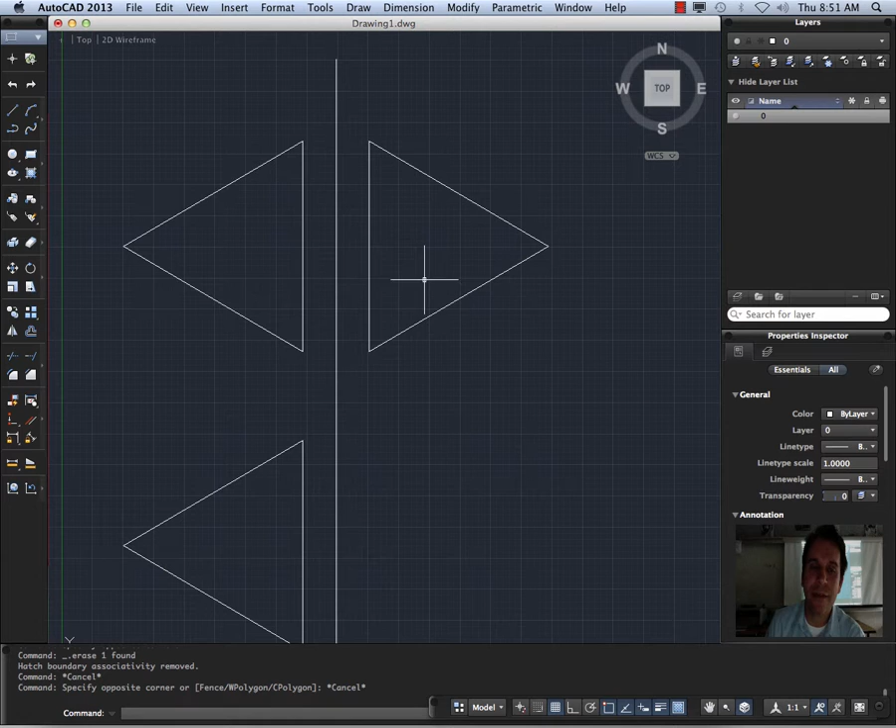Okay, so two new commands today. Our first one here: it's quite often that we need to draw things that are symmetrical in our drawings. In the past, I usually put a center line through anything that's symmetrical. I have my top object here, this triangle, and it is symmetrical with this other triangle on the other side. In the past, we'd either have to redraw our triangle or do all sorts of scaffolding around our center line, and it's a big complex process.

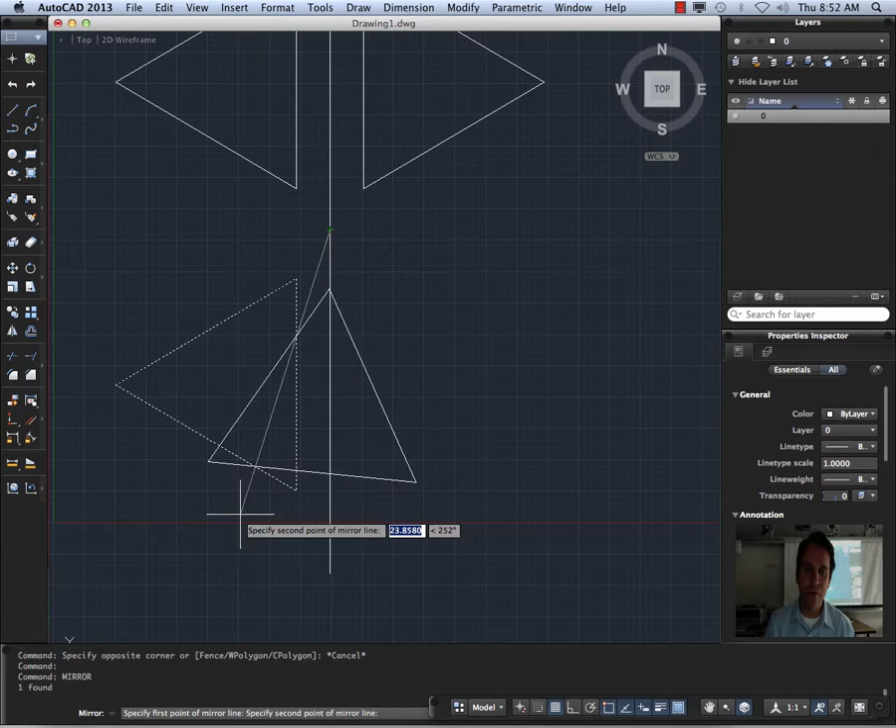So hence today, the mirror command. Watch how cool this is. I select my object, type mirror, and then I need to specify a mirror line. It's asking me to specify the first point, so I can click anywhere I want on my line, and then it has me specify my second point. You'll notice as I'm moving here, it's slowly hinging. As long as I click right on my mirrored line, it's now ready. Then it asks, do I want to erase my original object? Yes or no, default is no, giving us our symmetrical object.

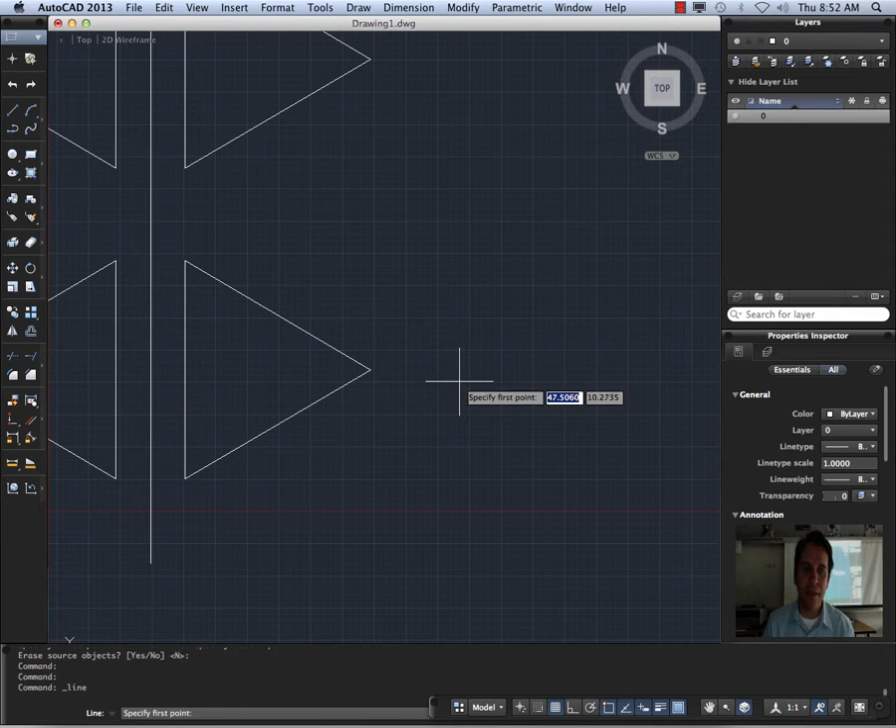So our mirror line does not have to be vertical. I can do a horizontal line here, and let's select both of these objects, typing mirror again, this time selecting my bottom line here. Voila, I've now mirrored this top one down to the bottom, which looks more like a copy.

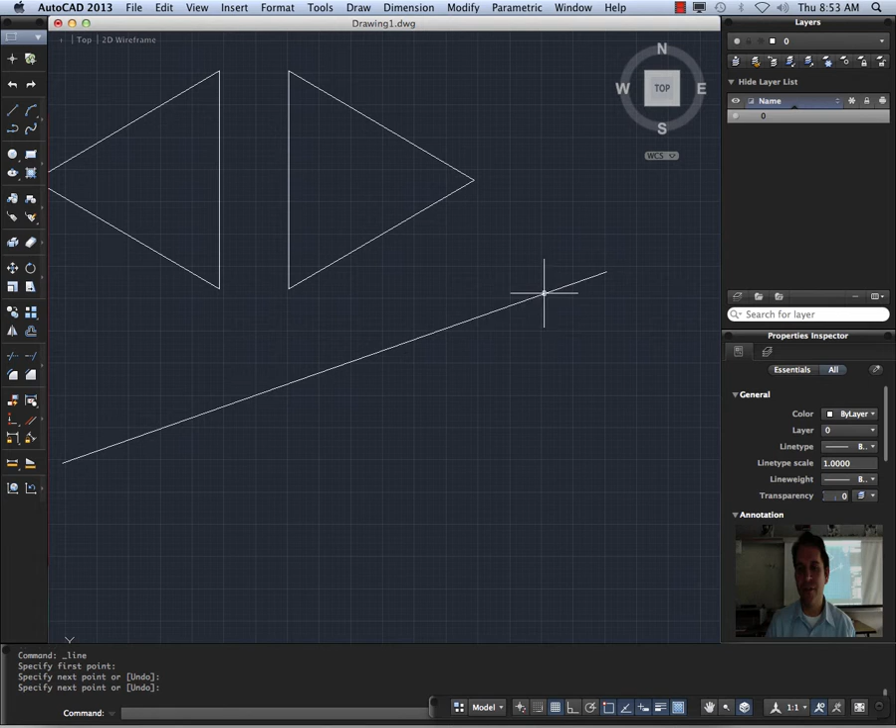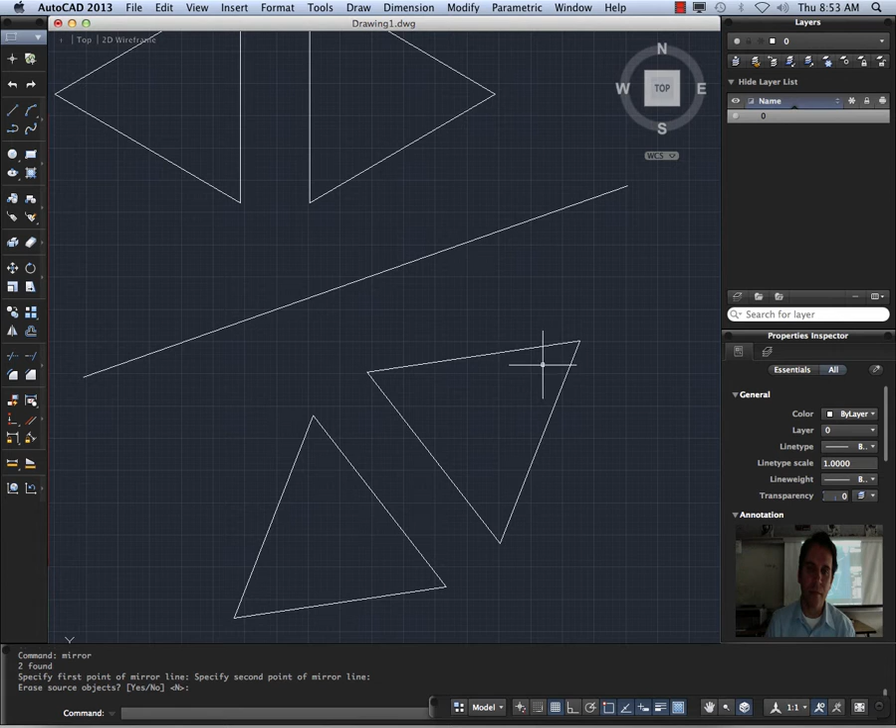And then one that's more complex: let's say I just have a random mirror line at an angle. So my object's going to be symmetrical, but symmetrical along this line. I can select these two objects, type mirror again, and select this line. Now the objects are still symmetrical, but along this line, not a clean ortho-like line. So that is our mirror command—nice, quick, easy command to make things symmetrical.

Question? Are you stretching? Okay.

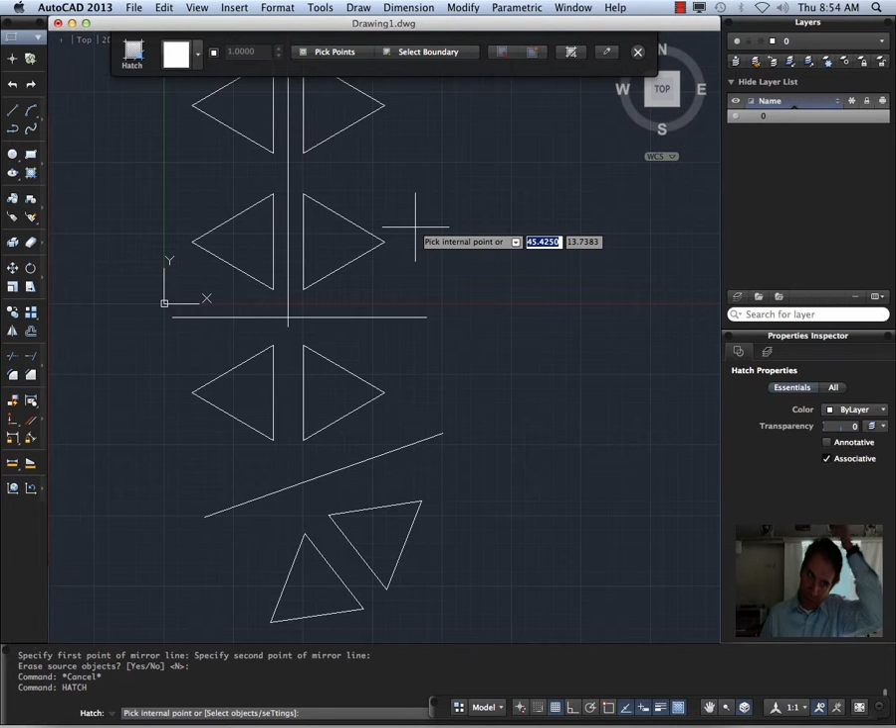Next command, hatch. Quite often CAD will do a number of different types of filling of shapes, and the command for that is hatch. The Mac interface here is pretty nice—it brings up this little hatch window, and there's a number of different types of hatches. There's regular hatches, which is more traditional drafting architectural stuff. You'll notice all these numbers mean things in architectural languages. All these ISO ones, ISO is the International Standards Organization. So all these types of hatches mean things.

Then there's some brick-looking ones. There's one that means sand. There's some that mean grass—all these different things for architectural purposes. So these are our hatches, and say I just do this honey one, for example.

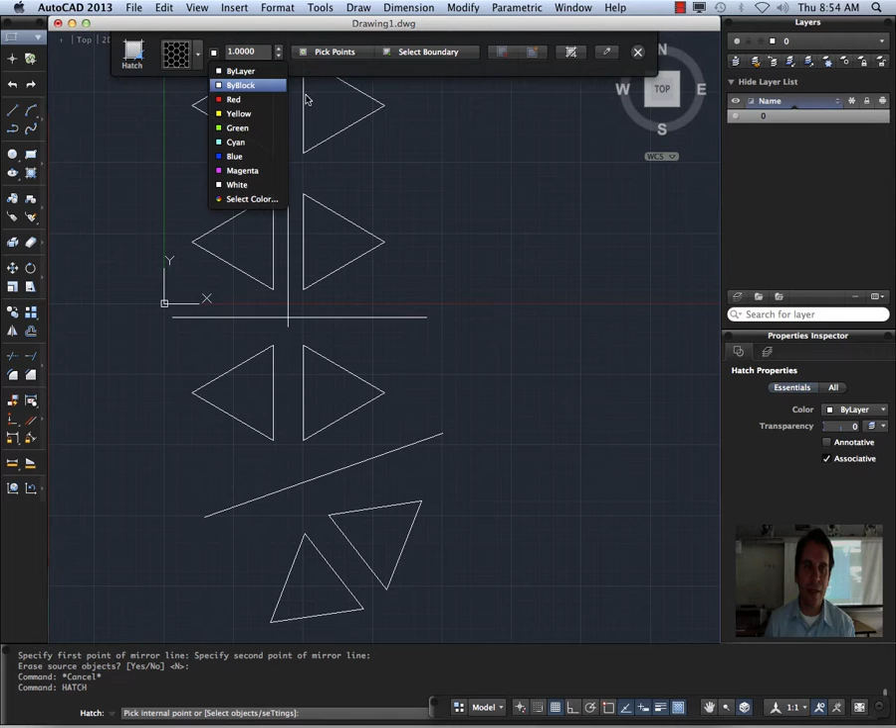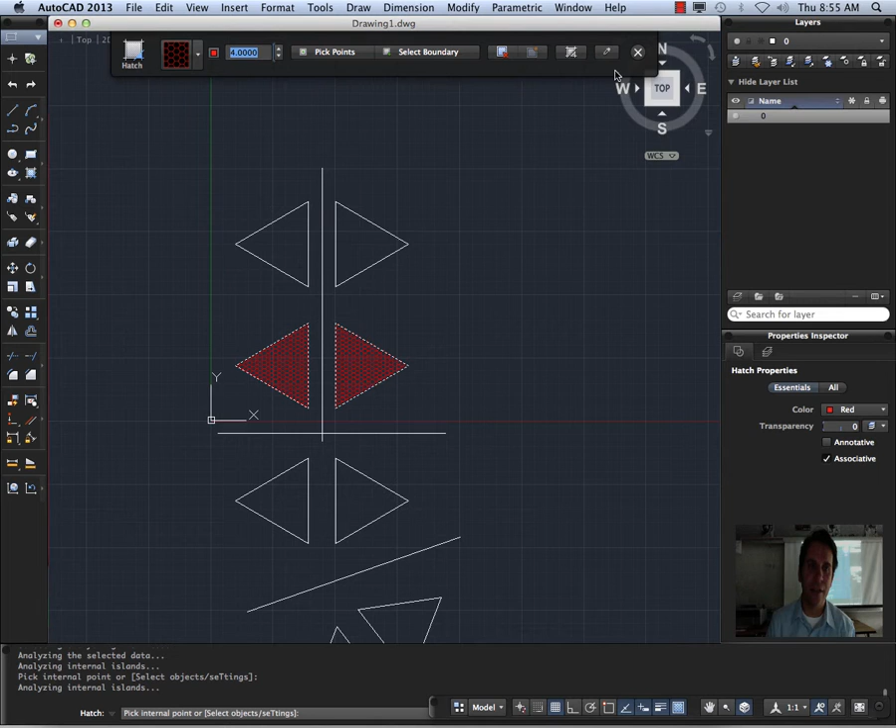So now I have my honey hatch selected here. I can choose a color, so I'll choose red. Then you just basically click inside the shapes that you want your hatches to show up. So I'm clicking these two, and if I zoom in, we can see I have my nice honeycomb. If I don't like my scale here—this looks a little too dense, I can't really see my honeycomb—so maybe I change my scale, I'll make it 4 times larger. Now by selecting that, it's a little bit more legible.

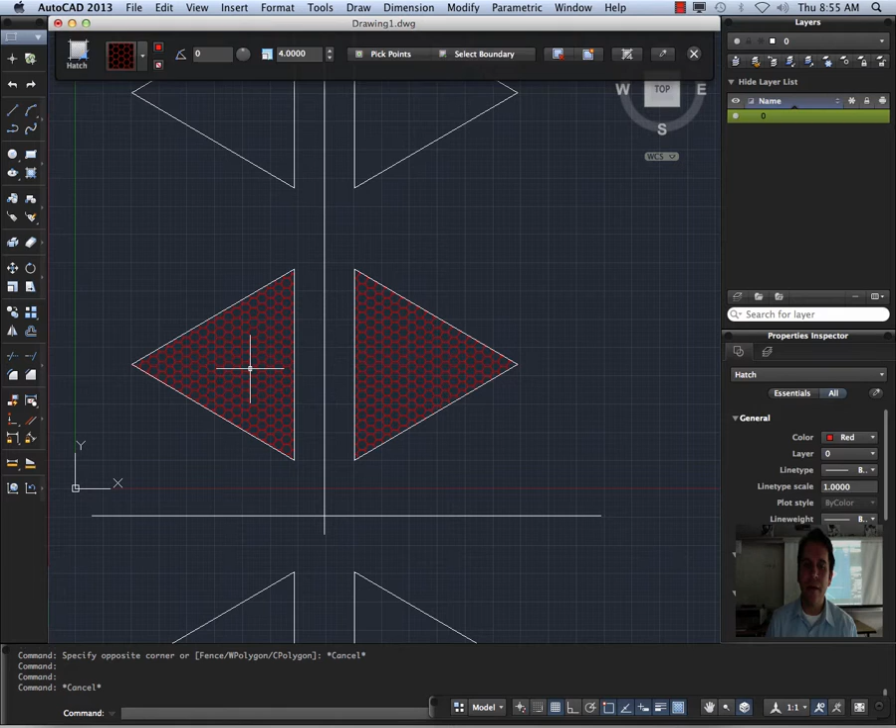And then just like any other object in CAD, we can specify how it's colored—manually, or I actually think I have a hatch layer. I'm not in my regular template, but when you open up your regular templates, I think I have a hatch layer. Yeah, here we go, hatch.

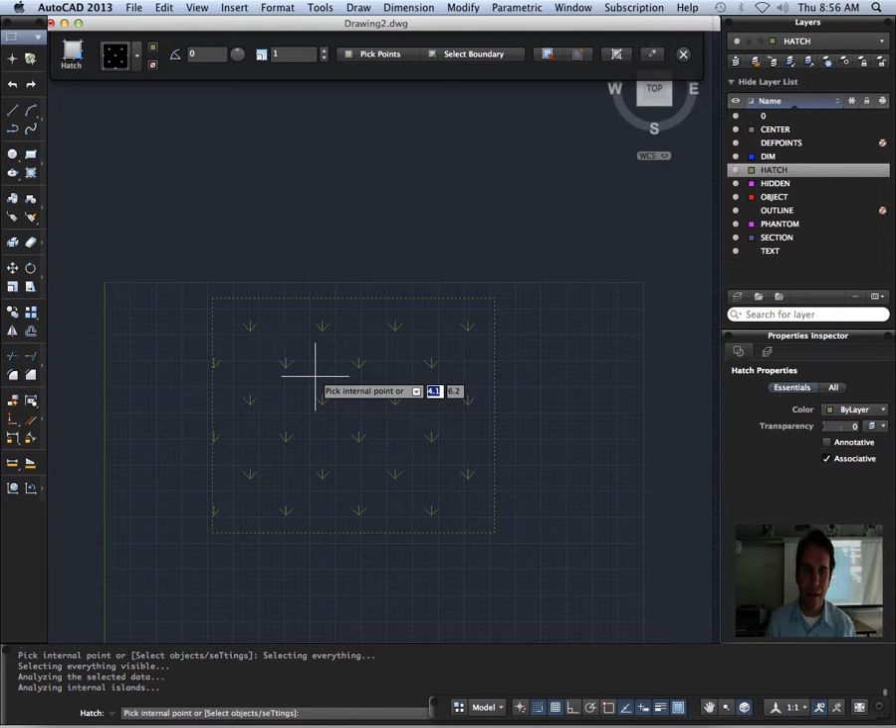So let's say I'm designing a house. Here's the yard, and the yard's going to have grass in it or whatever. So I'll go to my hatch layer, hatch this. In my predefined hatches here, let's search for grass. Here's my grass hatch, I'll just click in there. There we go—so I now have my hatch layer with grass inside.

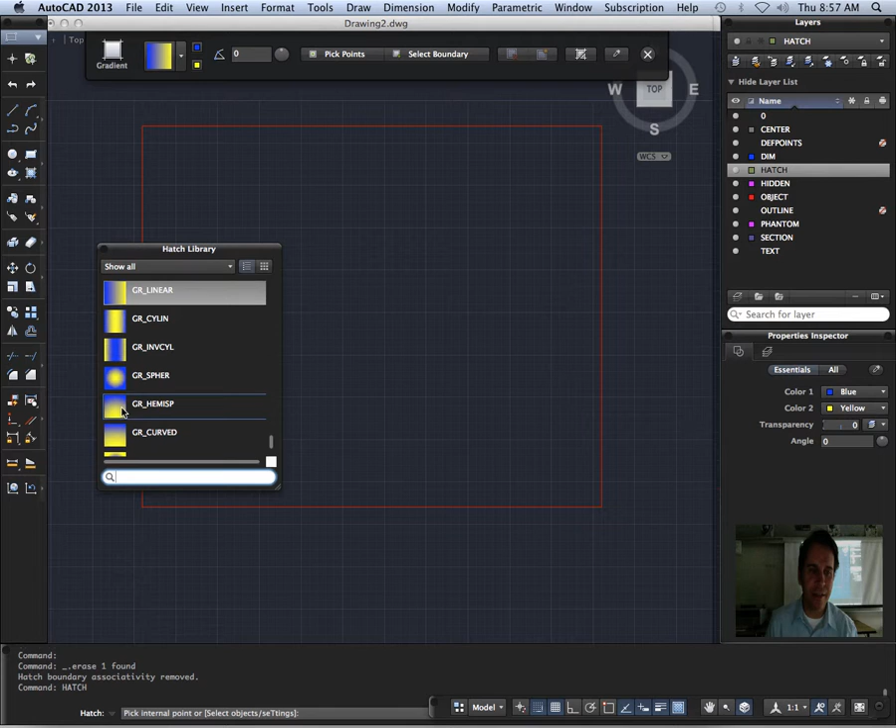In addition to these sort of symbol-like hatches, we also have some other cool ones like gradients. Here you can select one color and another color, and it will fade them between. There are different kinds of gradients. Say I want to do kind of a nice little sunrise looking one—so I've now added that hatch inside here.

For today, you can get creative in applying your hatches, but what I did in the assignment was just used solid colors. So here this color is just based on by layer, and it's in my hatch layer, so it's green. Or I can manually choose one of these standard colors, or get real exotic and go into my color selections, or there's other more complex ways of color selection. But I kind of like that purple, so I can go with that.

As we get into more complex hatches, you may find if you're drawing something and go to hatch, this is a pretty common mistake. So I have my, we'll call that complex thing here, and I go to hatch this. I didn't close my shape—I have this little opening here. So think of hatching as sort of pouring paint into a bucket, and if there's a hole here, all that paint's going to leak out, and CAD is going to get mad at you.

Let's see what'll happen if I try to hatch this. Yeah, so it's saying that the boundary cannot be closed—I can't hatch this area because it's got an opening. Oh, and look at that—this is new, it actually tells me where my opening is, which is nice.

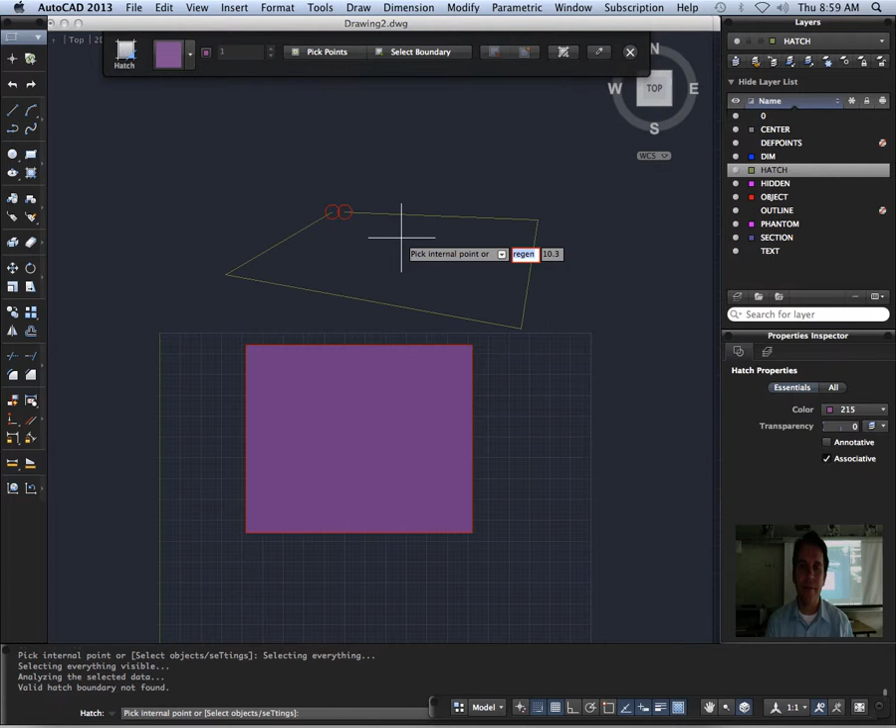So if you go to hatch and it's not working quite the way you expect, use your regen command—sometimes that will solve your problem. Sometimes it helps to zoom out and make sure you have the entire object you want to hatch visible, because if part of it's off the screen, it doesn't hatch. So you'll find hatch to be a little temperamental, so keep those few things in mind as you use it.

Questions at all on either mirror or hatch?